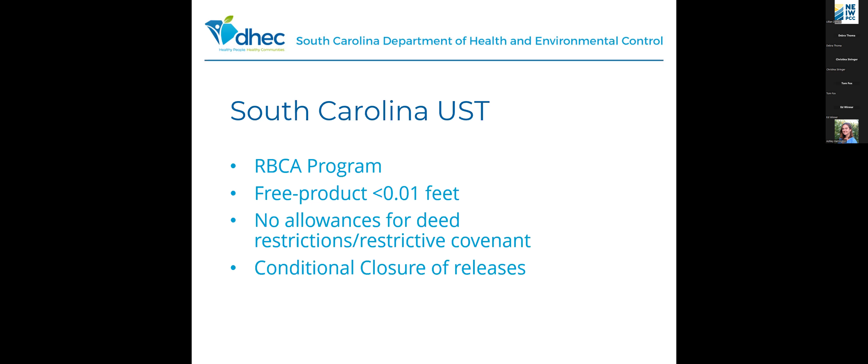A little bit of background of South Carolina's underground storage tank program. We are a risk-based corrective action program, which means site target levels are generated to be protective of identified current and future receptors such as surface water, features, utilities, water supply wells. Our closure requirements include that free-phase product be removed to less than 0.01 feet as measured in monitoring wells installed on the site. The program does not have any closure allowances for deed restrictions or restrictive covenants. We do have conditional closure of releases under the conditions that concentrations are below those established site-specific target levels, the plume is determined to be stable or decreasing, and future receptors will not be impacted.

A little bit of the history of our program and our remediation. We have been a pay-for-performance program. We began conducting various remedial efforts in the late 80s, early 90s. In those early days, we thought we understood what a completed assessment was.

Typically, it was 20 or so shallow monitoring wells and maybe 2 deep wells. Our historical remedial efforts were usually one technology, such as air sparge, soil vapor extraction, or in situ bioremediation. Usually, in those rare instances where we had multiple technologies proposed, it was an afterthought and only implemented

when the main technology failed, and oftentimes costs were near exhausted. We now have a better understanding, as we've gone through 20, 30 years, of what constitutes a complete assessment, and

remedial efforts really need to change as site conditions change to effectively remediate sites, so we don't get stuck in that specific technology. We're beginning to see a transition to more of a true treatment train approach, with more defined transitions and concurrent technologies that target different zones within the plume. Hopefully as we get into these more, this presentation can be expanded to really highlight those even better.

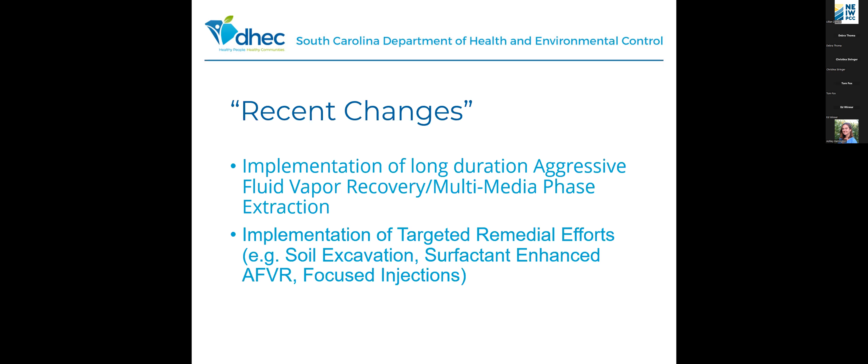For us, it's really a paradigm shift for most to change the conceptual way that we think and approach remediation of petroleum at sites. Many want to stick with what they're familiar and comfortable with, regardless of whether it will be successful. They're hesitant to offer contingency plans in the event that the primary remedial method fails to achieve their remedial goals. So those are things we have to overcome.

These sites were part of our state lead program, which for us means the state took the lead on these to get them through the assessment and remedial aspect. These were sites where the responsible party was determined to either be unwilling or unable to perform the work, and we basically stepped in on their behalf and selected the contractor to get the work done.

This release was reported in 1993. 4 tanks were removed at that time. It was reported as a pre-74 facility, meaning the tanks were last used prior to 1974. Our investigative work was completed in 2006. The lithology is coastal plains, which was interbedded silt, sands, and clays.

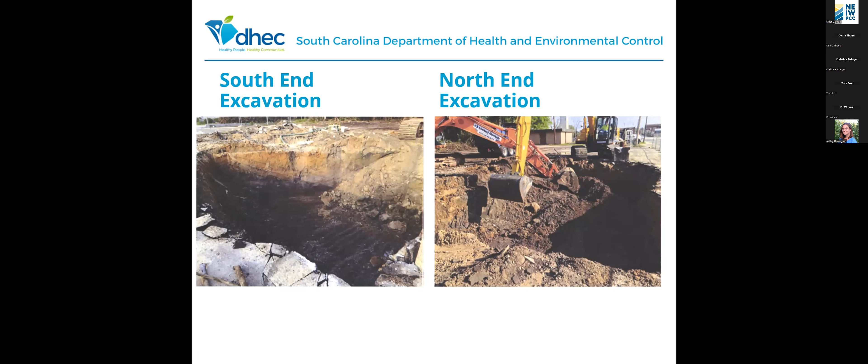This is a couple pictures of the excavation - the south end, the north end. Here's one of the tanks that they found. Here's the 3,000 and the 1,000 gallon tank.

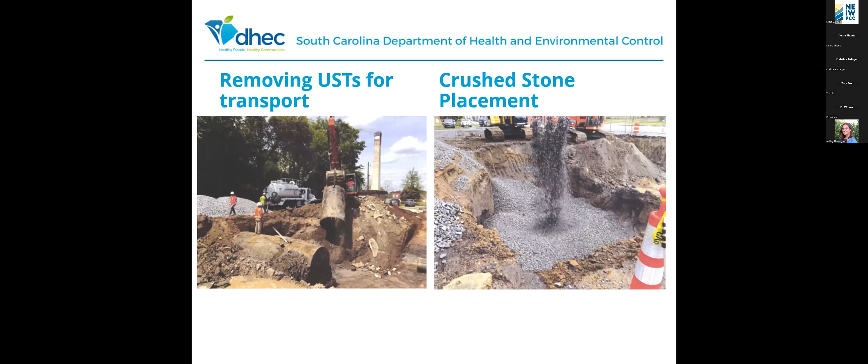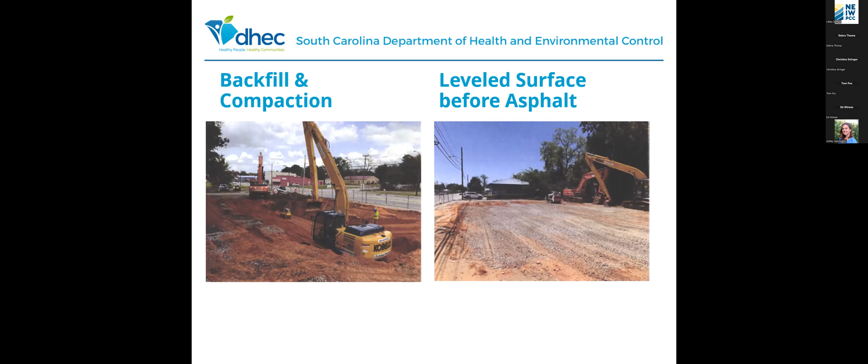Then pulling them out of the ground for transport, then placing the crushed stone in the excavated pit. Placement of the ORC, then mixing the stone with the ORC. Backfilling and compaction, leveling the surface before they did asphalt.

Now at the end, once they asphalted everything, they put 4 wells back in. They did 3 confirmation groundwater sampling events. The final sampling showed residual petroleum in the area of 5.6 parts per million total BTEX. It was below our closure requirements, our site-specific target levels, and we issued a conditional closure for this site in November of 2020.

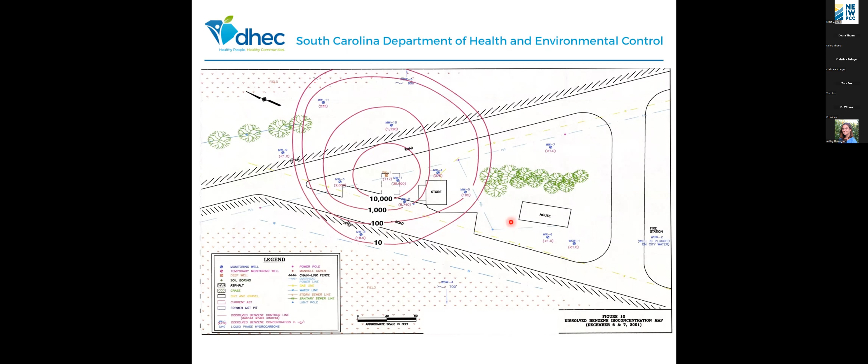So from 2002 to 2008, we did corrective action, which was a combination of AFVR and chemical oxidation. They put hydrogen peroxide and microbial solution was injected into temporary injection points. By January 2007, the free product was less than 0.01 feet, but the dissolved concentrations were still present, with a total BTEX about 83.7 parts per million.

In 2008, the contractor that had been selected to do the work - we worked out a negotiated release of that contractor from the contract that we had entered into.

Now, in 2013, free product showed back up at its greatest thickness of 3.34 feet. There were no tanks out here. We believe it was because the water table rose over 3 feet in that duration. Groundwater fluctuates greatly out here, from 4 feet to 15 feet. So that 11-foot fluctuation basically flushed out a lot of stuff.

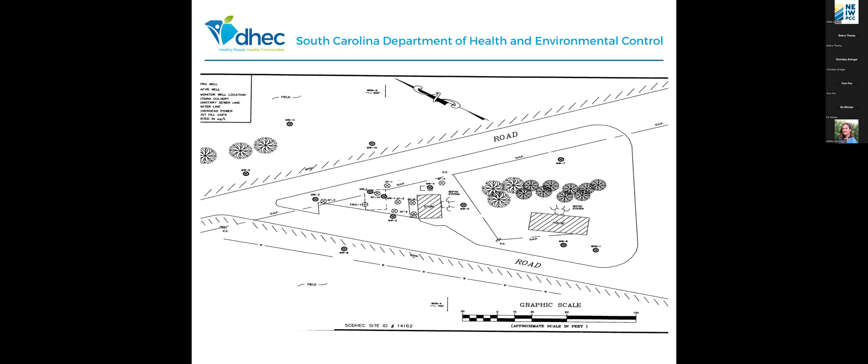2013 to 2016, we conducted some of those long duration AFVR events, and we ended up getting 56 gallons of petroleum as a result of that. We still had a high dissolved concentration out there, and we decided this was another candidate for excavation. So this is the approximate area that they were going to excavate.

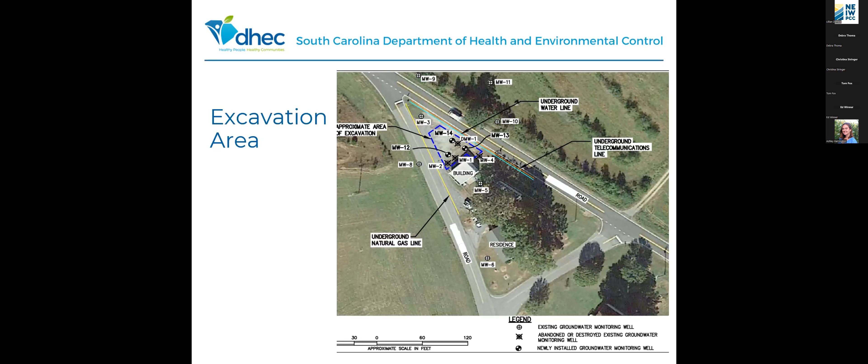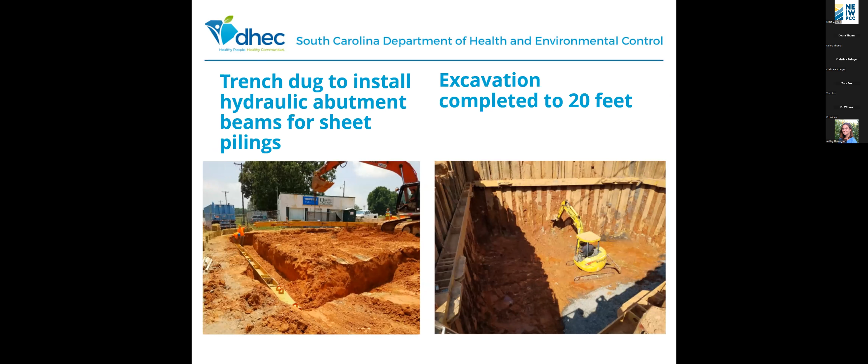They had to dig a trench and install sheet piling to take care of this. This shows them doing some of the excavation. It was down to 20 feet. They backfilled and put in some oxidizing compounds. The backfill and compaction.

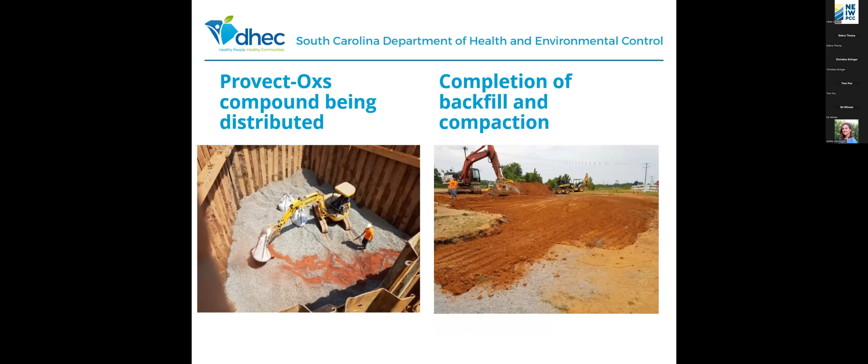And again, once they were completed, they installed 3 wells. They did confirmation sampling in September of 2019, March of 2021, and October of 2021. The residual petroleum was down to 3.9 parts per million, and we issued the conditional closure in December of 2021.

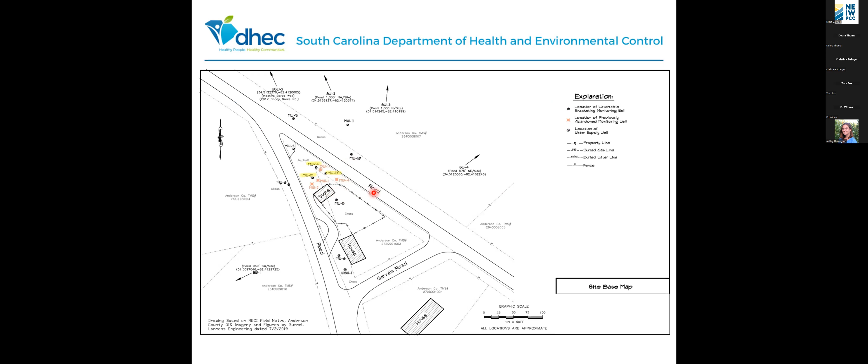Again, just showing the cost for this, our total cost being just $468,000 to bring it to closure.

Primarily silty clay and clay silt. The highest soil reading was about 10 parts per million. The highest dissolved BTEX was 31.4 parts per million. The depth to groundwater fluctuated between 4 and 17 feet.

Remediation was conducted out here from 2005 to 2007. They injected about 2,300 gallons of hydrogen peroxide into 20 injection wells. This is one where the contractor was decertified under our program, and the contract was subsequently canceled. We did some subsequent sampling after that, and the residual BTEX remained elevated around 10 parts per million.

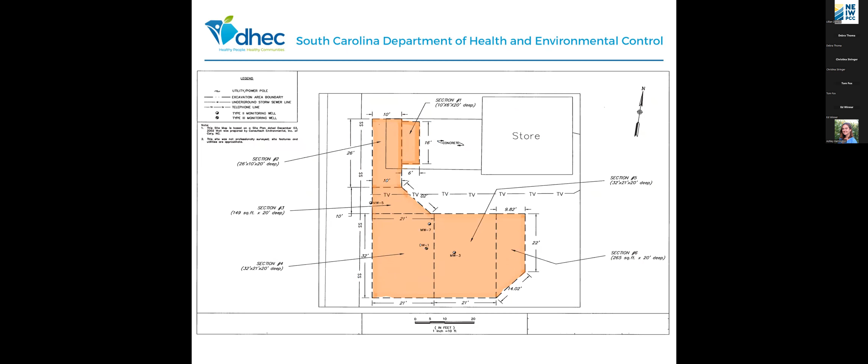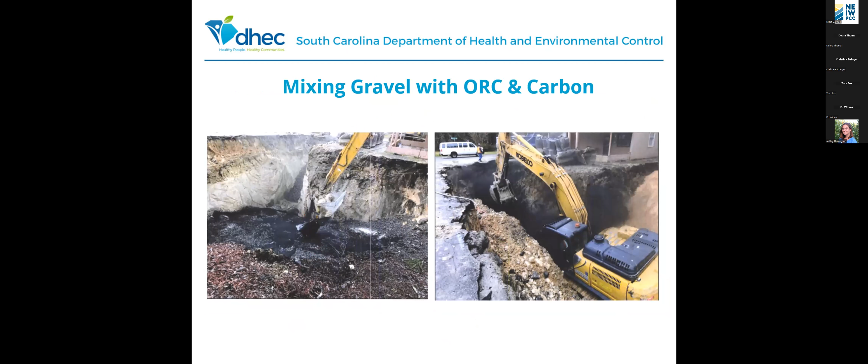They installed 3 monitoring wells afterwards and conducted post-sampling. Residual BTEX was 0.9 parts per million. A conditional closure for this was issued in September of 2022. Cost for this was about $457,000.

The reported release happened in 1987. The tanks were removed in 88 and 2000. Investigative work was completed in 1997. It's coastal plain, so it's silty sand and sandy clay. This house was constructed in 2003. This house was not constructed without controversy.

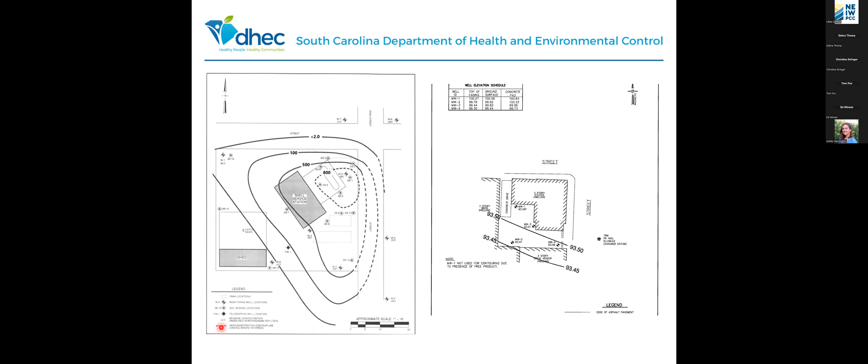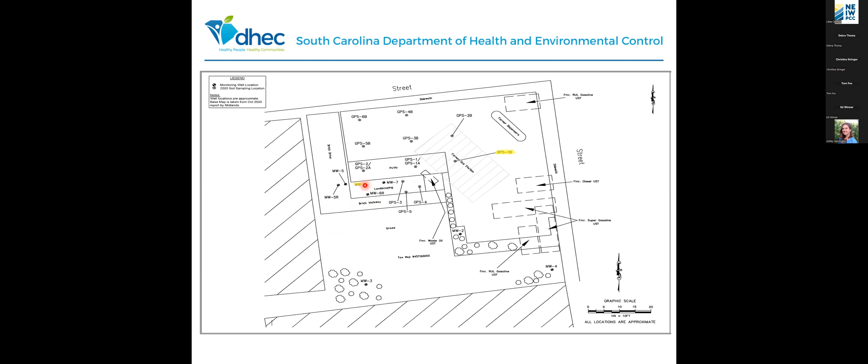Now, this shows what the site was before the house went in, where the hotspot was, and where the house is today. So that hotspot's probably right about there. So in 2003, monitoring wells had to be reinstalled after the construction was completed. We did some AFVR events in this area from 2004 to 2009 because it did have some product. All other wells that were installed out here were non-detect.

From 2014 to 2016, we did some passive free product removal. We did some more AFVR events in 2016 to 2019. In 2020, we did some soil investigation and collected soil samples from the crawl space under the house using a hand auger. The highest concentration was detected here with a benzene concentration of 613 parts per billion and total VOCs of 526 parts per million. So we decided that we probably needed to look at trying to get some of that soil out.

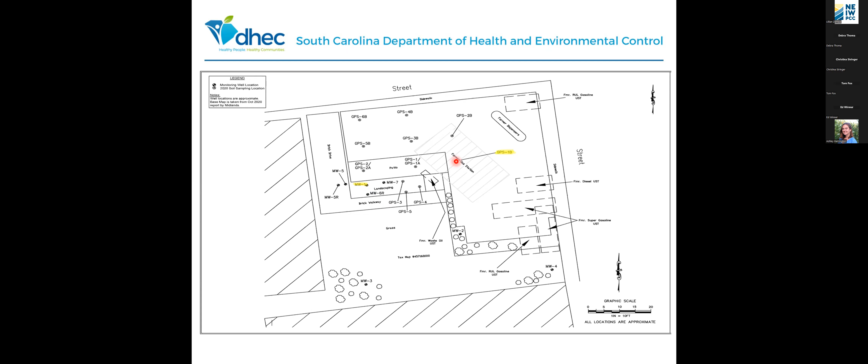So the selected company worked with the property owner and the property owner's engineer to complete the excavation at this site. This was their proposed excavation. They removed 59 tons of soil. The excavation was to be about 8 feet where possible because it was coastal. Backfill was coarse gravel mixed with sodium persulfate.

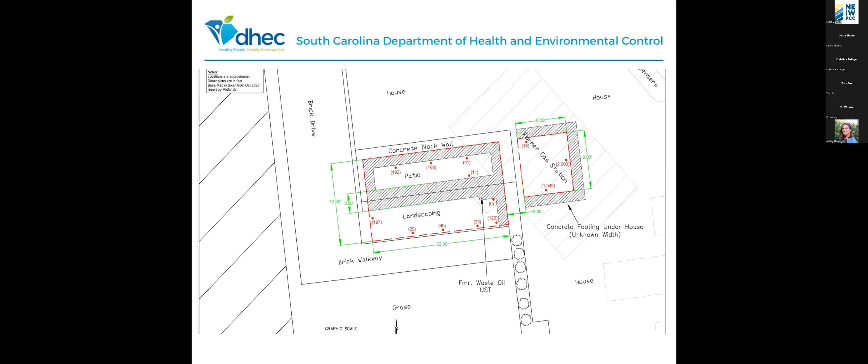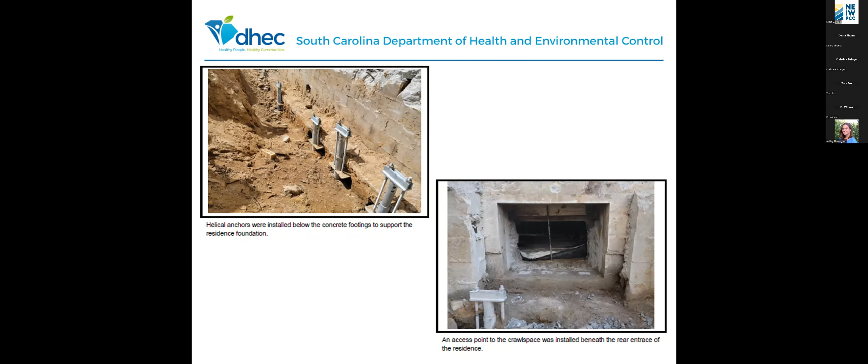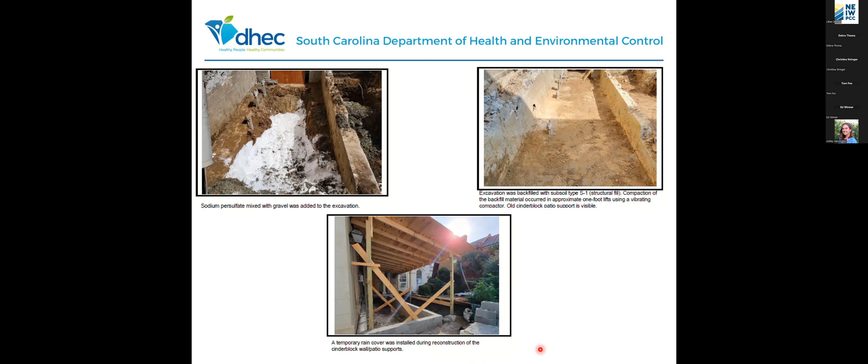They had to do some anchors to support the residence foundation. This was the access point to the crawl space where they had to manually remove soil. This is the sodium persulfate mixed with the gravel. This is outside, basically in here, where they backfilled and compacted. The old cinder blocks and patio support are still visible. They had a temporary rain cover installed during reconstruction. This one, of course, because of the situation, cost a little bit more. Total cost is about $890,000.

So over these 4 sites, the average time to closure was about 28.5 years. The average cost was about $621,000. Again, the sites presented had multiple technologies deployed. We tried just about everything under the sun to get these sites to closure, and we decided that excavation was an effective source removal method and long-term treatment solution, and it was utilized when other remedial methods were no longer effective.

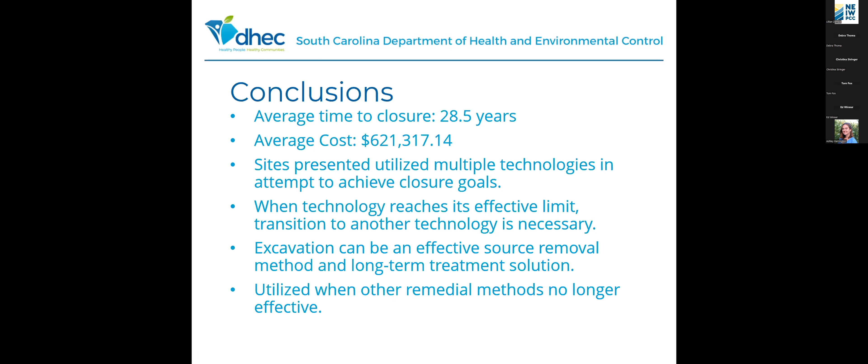And we brought some sites that were what we considered legacy releases to closure. And we're hoping that as we look forward to being able to implement targeted treatment technologies, both individually and concurrently, we can expedite site closures in the future. And it will allow for a more thought out and purposeful implementation of this concept with the remediation of petroleum releases in mind. So with that, if I can get my mouse to work, I am done.

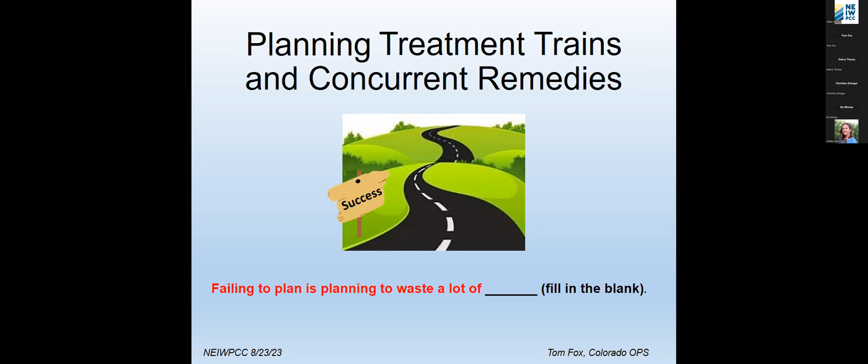Because we all can recognize that failing to plan is planning to waste a lot of, and you can all fill in the blank, but I like to use either time or money since everybody seems to be in short supply of those two things. Now, back in the old days, by the old days I'm talking about anything prior to maybe 2010, many states required that a CAP to closure be submitted. Colorado was one of these states. And we often ran into issues where, what does this really mean? And can you get to no further action or closure of a project in one try?

Inevitably, we found that CAPs needed to be modified, often multiple times over sometimes several decades, as some of Deb's sites illustrated to you. So how are these modifications going to be made? How are cost changes and differences reconciled? And then ultimately, how do you judge remedial progress on the site?

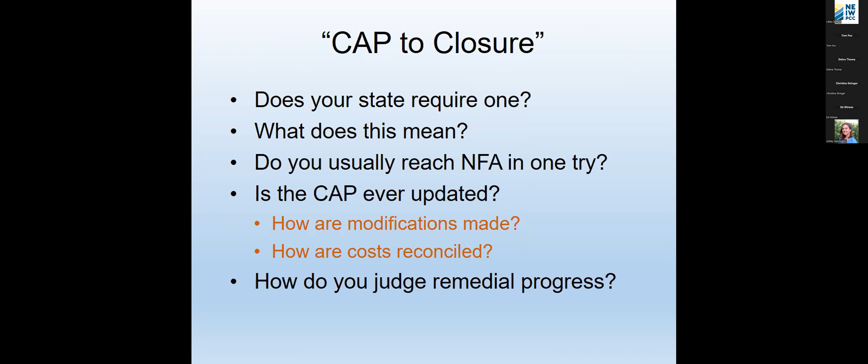So let's talk for a little bit about how to plan the life of your project instead of throwing things at it over time, which is typically an approach that a lot of people try to take. And it's frankly just very unprofessional in this day and age.

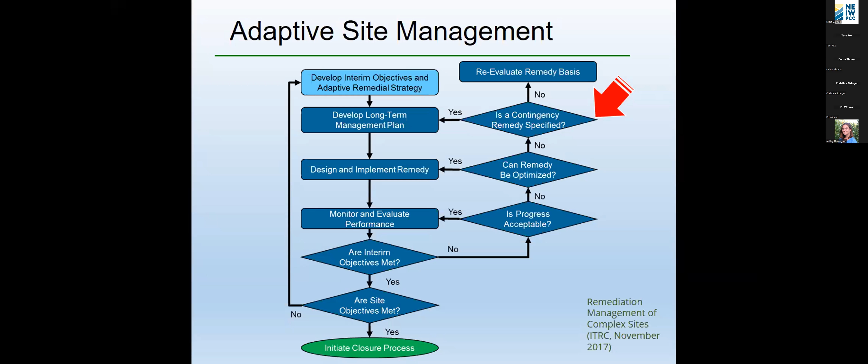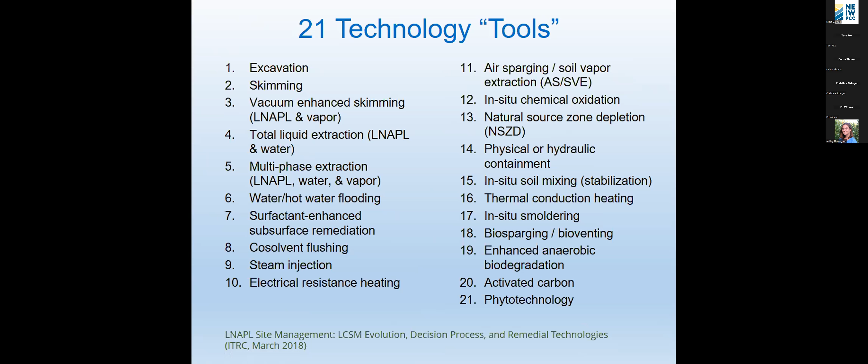One thing that was not included in that document and was kind of frowned upon for its inefficiency are these items: manual bailing, short-term vacuum truck events, and by short-term, I'm talking about a couple hours at a time in various wells, passive skimmers, and absorbent socks. And why weren't these covered is basically because the mass of LNAPL that's recovered is really insignificant when compared to the entire mass that you're trying to address in your cleanup.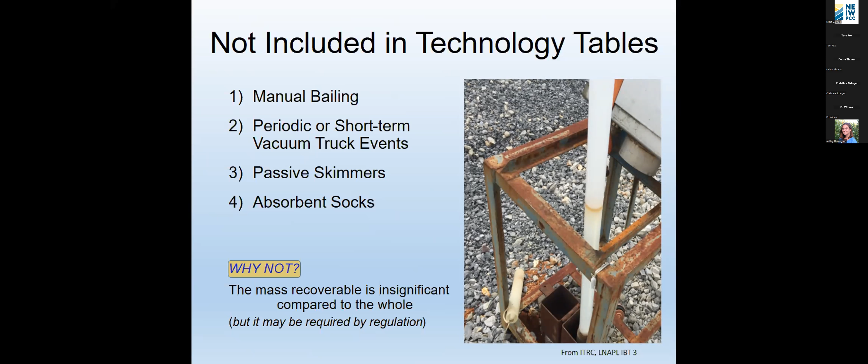In some states, however, these steps may be required. For example, maybe in South Carolina, where they have to remove free product down to 1/100th of a foot. So if you have a regulatory requirement, then you will still need to attempt to use some of these, but I encourage you to talk to your state agency about that.

In the ITRC document, the technologies were broken into 3 general groups based upon what they do to the petroleum as the cleanup continues. The first one is called mass control, which is basically where you're creating a barrier or some type of a limitation on how far the LNAPL can move. Mass recovery tools basically look to remove the LNAPL or the LNAPL mass, dissolved or otherwise, in order to limit that migration. And phase change tools look to address generally adsorbed and dissolved contaminants that are within gasoline and abate those to acceptable levels within the state guidelines.

So, for example, if LNAPL migration is a concern, a mass control technology would be your first group of technologies to look at. And if you had compositional effects, you'd look in the phase change. And there was a nice little ternary diagram that ITRC put out where each time a tool was talked about, it would put a dot in a corner. What was also recognized, however, is that some technologies will actually overlap. For example, you can institute a phase change technology along with a mass recovery technology, for example, dual phase extraction, and get kind of double the bang for your buck if that's something you want to do.

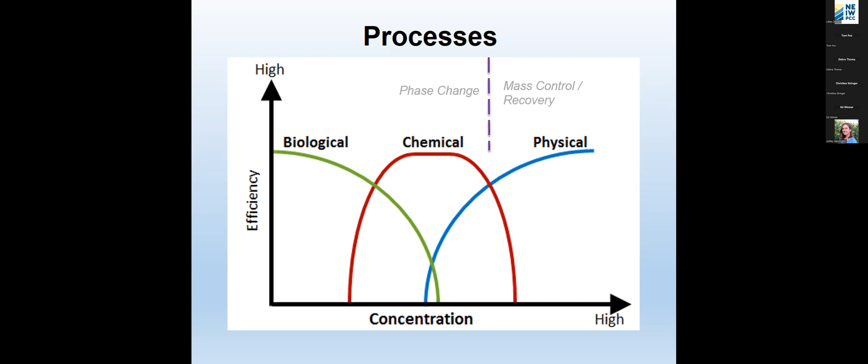What's interesting about this is generally physical controls are useful when concentrations of the contaminants are fairly high. And then as concentration drops, you're getting into more chemical and biological processes to address the lingering effects from the contamination. And again, on the left-hand side, just simply showing the efficiency of when you would use each of these processes. So now that we've introduced these different processes in a different way to look at how these tools work, let's talk about how we can group the 21 tools that we had.

Physical generally refers to they're going to have some type of a site disruption, either excavation or a system installation or something like that. Chemical processes will refer to some physical phase or chemical change to a contaminant, and usually by your influence. And biological changes can be your influence or simply monitored natural attenuation, where you enter into that type of remedial technology and encourage degradation in that effect.

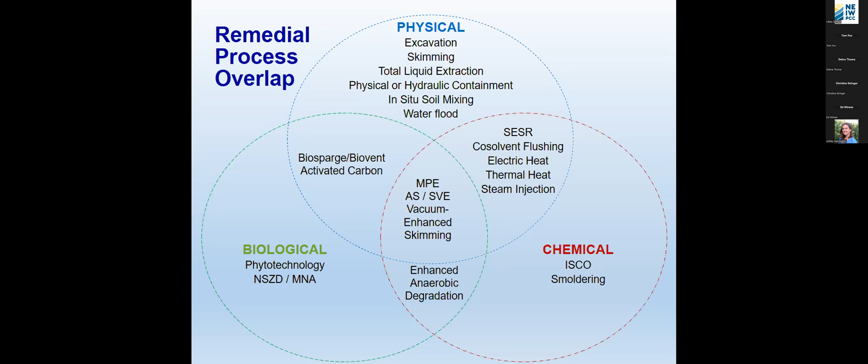So in many cases, biological processes are a tool of last resort, unfortunately, and they're often relied upon where time is not critical or funds or access are very limited, but further cleanup still needs to be taken. So let's talk about some things like what will these tools do? What can they actually achieve for me? So every process has a limit to its effectiveness.

For example, LNAPL recoverability. Everybody wants to get all the free product out of the well and out of the ground. Mainly it's to stop further migration and spread of contamination. There has been extensive documentation that a reasonable LNAPL transmissivity rate is somewhere between 0.1 and 0.8 square feet per day.

If you are unfamiliar with LNAPL transmissivity, I can't get into it here, but I encourage you to look up the ASTM standard and also look on the American Petroleum Institute website for the worksheet where you can do the calculations to estimate LNAPL transmissivity, which is frankly a measure of its recoverability.

Volatilization: typical site tools for this are air sparge and soil vapor extraction. You're going to look to see that the contaminant you're trying to remove has got a certain vapor pressure. In other words, it's volatile. And you may also want to look at what your PID emissions rate would be. You're looking for some sort of a stable amount of whatever parts per million you might choose or your regulator decides to put on the site.

Injections would include in situ chemical oxidation, or ISCO, and carbon injection also. Often soil textures or the geology that you're faced with can limit delivery of an oxidant or anything else you're trying to get into the ground. So you've got to be aware of that.

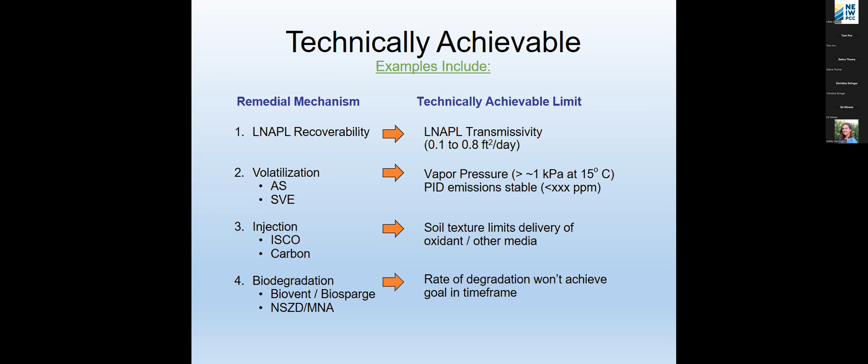So let's talk a little bit about treatment trains. A treatment train is a consecutive remedy in one place. So these are technologies that are implemented in a sequence, as Deb has indicated. And these are based upon what your contaminant concerns and what your objectives are to get cleanup going. Often you're going to start with a primary technology, which might be excavation, as Deb had indicated. And again, that's tailored for the higher contaminant mass that you might find immediately after discovery of a release, for example, or very close to the release source.

And then you would continue on with a second treatment technology, maybe ISCO, again, as Deb has illustrated in her examples, and maybe even move on to a third polishing step, which would be carbon-based injections, or maybe enhanced biodegradation to address the contaminant mass.

What's important and what I want to emphasize with you is to realize that your site, and again, it depends how contaminated it is and how extensive it is to start, but you may be able to clean it up with only one technology, but more often than not, you're going to have to plan what technologies am I going to use when the one I want to start with doesn't get me to closure.

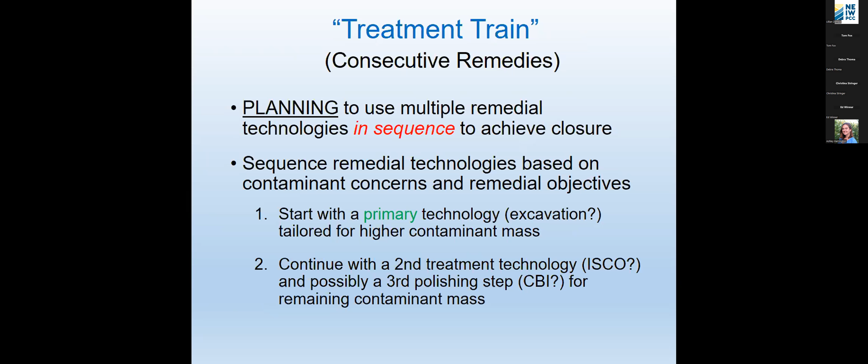So treatment trains, as I've alluded to, very commonly, what is used at a site is unplanned. There's no objectives. There's no metrics for when you're going to move from one technology to another. There's no milestones and endpoints and so on that have been decided to switch from technologies. And this is pretty much illustrated when people are trying to throw more technologies at the problem. Unfortunately, I see this all too often.

Now, what is good about treatment trains is when you plan them with smart objectives, and I'll get into some of this in a few minutes, how you decide when to transition by using metrics and what the milestones and endpoints are for the technology. So we're looking for an orderly implementation, if nothing else in the beginning, at least a conceptual layout of where you think you're going to be moving along this series of treatment technologies as you get the site ready for closure.

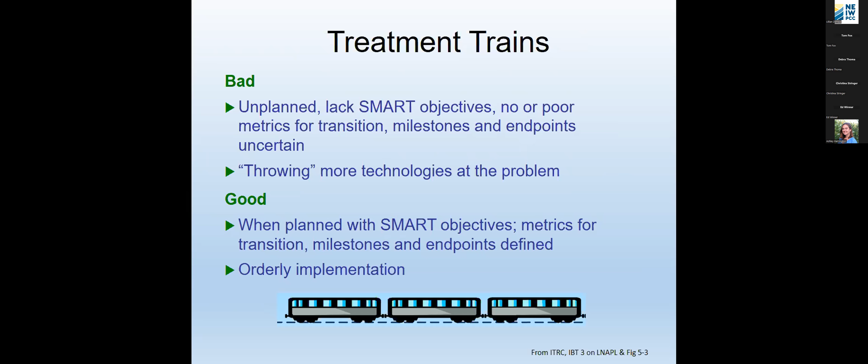So hopefully everyone gets the treatment trains concept. Now let's talk about the cousin that I've referred to, and I've termed concurrent remedies. So before, with treatment trains, we're talking about consecutive technologies where one is used one after the other. These are technologies that are used in different areas, perhaps even at the same time. So how do you plan to do this?

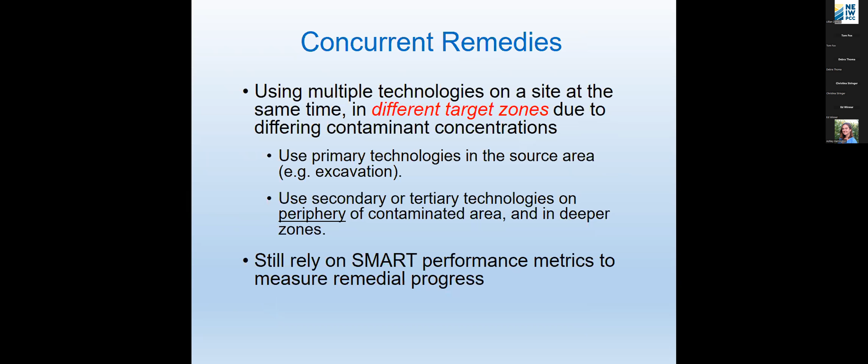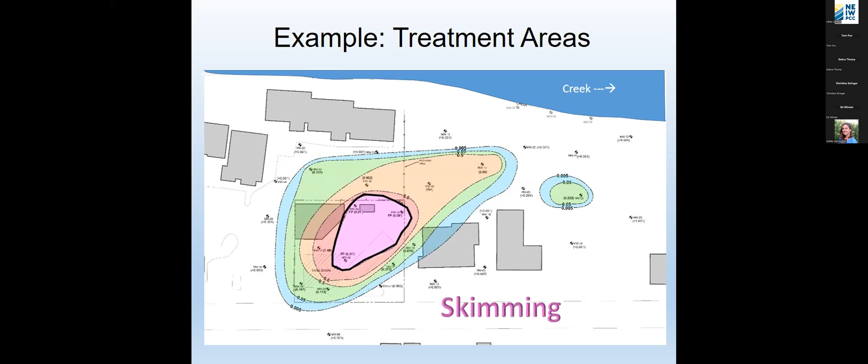So how would we address a site like this when we find it? We've done obviously some site characterization to get to the point where we're ready to do something about it. First we're going to probably look to try to remove the free product that we can. Again, this comes back to, can you do this? Are your LNAPL transmissivity values above the range where it's recoverable? Or do your regulatory agencies require you to go after it? So a technology you might use would be skimming, and there are several others you could do. I'm using this as an illustration only.

The next thing you could look to do would be in the surrounding area where you don't have free product would be air sparging. So this is kind of a halo around the source area, for example. So let's move to yet another area of concern, and that would be the buildings themselves that are outlined. One to the left is the gas station building facility itself. The one on the right is an off-site property. I don't know what it is, and it frankly doesn't matter.

But by the mere fact of air sparging and the high concentrations we have here, you're probably going to generate some vapor. And therefore, you need to mitigate that vapor and abate it by putting in an SVE system around the buildings to protect them so that you don't have vapor intrusion. Now, many people like to come out and they'll do air sparge and they'll design a complete coverage of SVE at the same time. Frankly, I find that a little wasteful of resources and very expensive.

If the vapor is going to go into the soil and naturally biodegrade, as vapor often does, there's really no need to emit it directly into the atmosphere, create air pollution issues, odor issues, perhaps for neighbors, when you can allow it to naturally degrade in the soil. So we always try to get people to focus in on what are you trying to protect with your SVE system, rather than we have to gather up every single drop of vapor that we generate from our air sparge system. You'll find that this cuts the cost of your system and the installation and disruption to the site quite significantly.

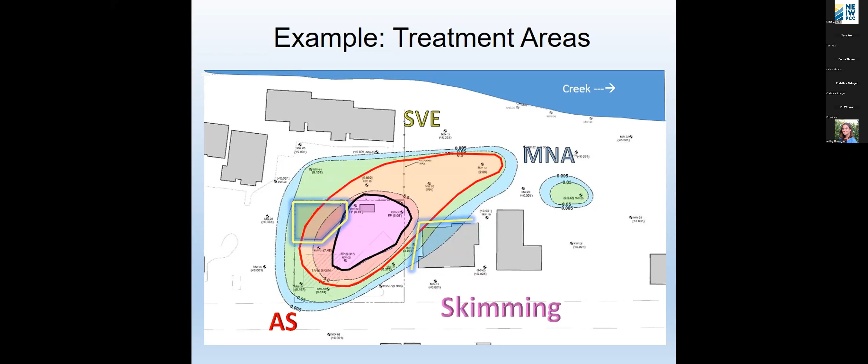Now, one thing - I've shown you a map, and a lot of people forget the third dimension. Depending on your concentrations and extensiveness of contamination, you can use different technologies in different ways. For example, you may be bioventing in the vadose zone, or SVE, as the case may be.

You'll be skimming the LNAPL at the water table surface. In certain areas, you may be sparging where the contamination is higher, or doing enhanced bio or even MNA in other areas where the contamination is less of a concern. So please keep in mind the depth of your target zones that you're after with your technology too.

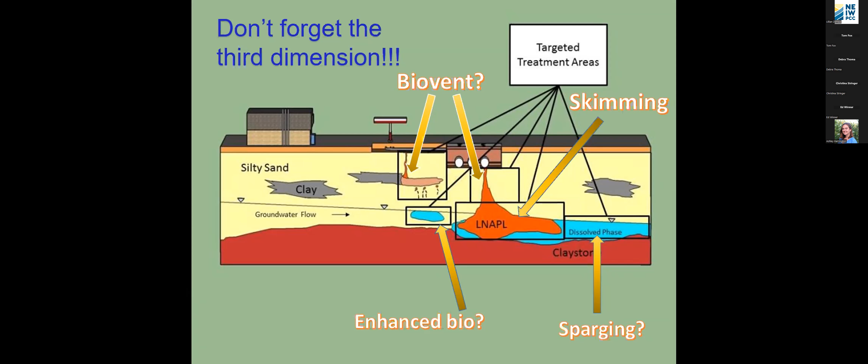A couple terms I threw out earlier: metrics, milestones, and endpoints. A lot of people get these all confused, and at this point they're like, what are you talking about? So let's give an illustration on this.

Let's talk about my vacation, for example. On your vacation, or my vacation, you can move to a different place by any of several different technologies. I've chosen automobile, airplane, or you can go by boat. So your technology is your means of movement.

The endpoint, of course, is the end point of the technology. You can only drive or fly so far, and you have an endpoint - the technology won't get you any further. You have to switch to a different technology. For example, you may fly to some city, you have to rent a car to get the rest of the way, and you may end up walking to get to your final destination. So you can see right there, I've used three different technologies, each with their own endpoint to get me to my goal.

Now, each of those may also have a milestone, and I'll use the last example of the ship - the ship may sail and it will stop in an intermediate port. That is a milestone, a stopping point on the way to your final goal.

What's interesting in this situation is what type of metrics would you use, to use the final term I've already implemented. So metrics would typically be time or distance in this situation - that's how most people would measure how they're going from one place to another. Now, the metrics you'll use for petroleum cleanup are going to be quite a bit different, obviously.

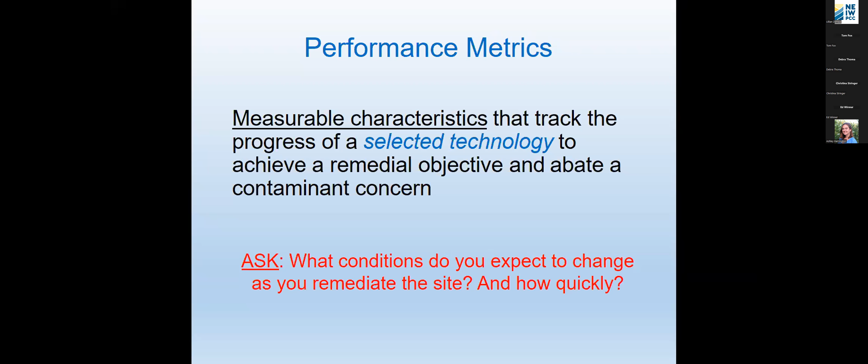So metrics, again to emphasize, are technology specific. You track your progress toward an endpoint or maybe a milestone. You verify that the remedy is being implemented effectively. You allow for any mid-course corrections and optimization of the system operation or design. It also gives you feedback as the system operates and things respond to the forces you're putting on the site, allowing you to update and change your conceptual site model ideas.

You may find that some area of the site isn't cleaning up as fast as you thought it would. There's probably a geologic or some other reason as to why that isn't happening, and oddities like that are worth your time to investigate to find out why your conceptual site model is not what you thought it was.

So here are some examples. For air sparge SVE, we may look at concentrations in emission samples, your PID readings, benzene, and other things you can monitor going up the stack or coming out of the ground. For in situ chemical oxidation, you may want to evaluate the distribution. Often you'll see pH, oxidation reduction potential, and dissolved oxygen change as the ISCO application goes through its 45 to 90 days of life.

For soil vapor extraction, you may want interim or even final soil confirmation samples if your state requires that. And for monitored natural attenuation, you may want to monitor over time the organic, inorganic, or even biological samples you collect to document that natural attenuation and biodegradation are occurring, and perhaps at what rate.

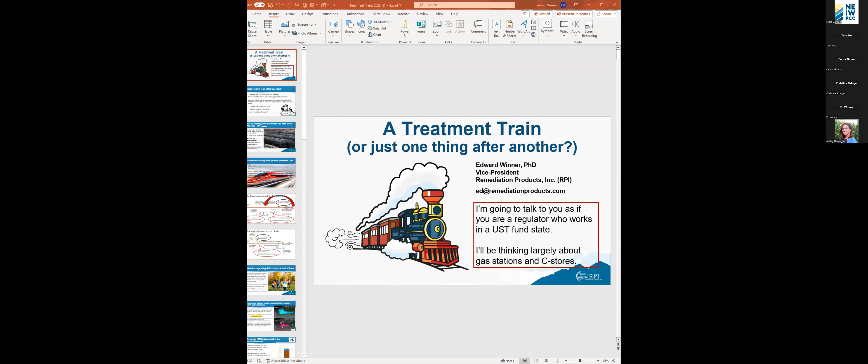Okay, so I want to talk about treatment trains versus just one thing after another. And I like to think about who my audience might be. So I'm going to make up a bit of an audience that may not include everyone who's listening, but that's alright, because then you'll be listening in on someone else's private conversation, which is far more interesting.

So I'm going to assume that most of my listeners are regulators who work in a UST fund state and have to control those funds and produce a result with those funds. And as far as sites, I'll be thinking largely about gas stations and C-stores.

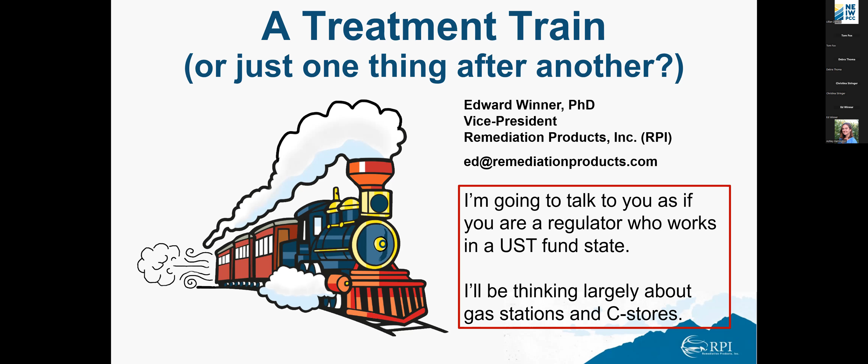So a treatment train is just an efficiency effort. There's no inherent value to employing multiple remedies. You just want to look at each technology and recognize that it has an application and a period of operation for which it is most efficient relative to the geological setting and the site goals.

So what is efficiency? For you, efficiency is just the total petroleum hydrocarbons removed per your effort. And effort for the state is just time and money. So how do we attain efficiency?

You start by knowing what it is you need to do. So do you need to remove one tanker or 100 tankers? In order to have a sense of what that is, you need to have sufficient site characterization. You need to locate the mass of contamination in its three-dimensional sense, both across the site and at depth. And you need to estimate that mass of contamination. That is your first job.

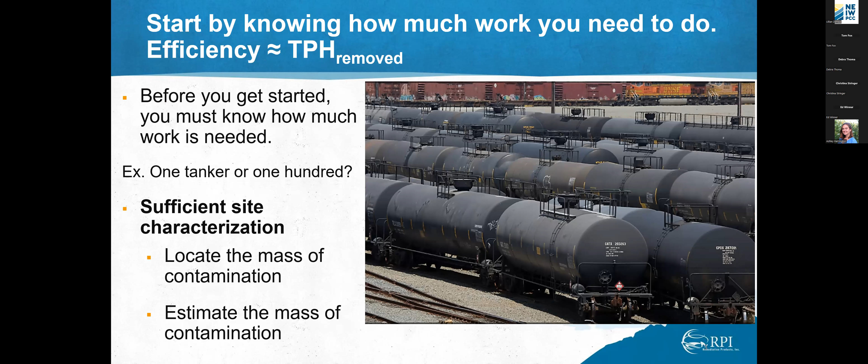It's this characterization which is key to an efficient treatment train. Without thorough characterization, any success you have is just an accident.

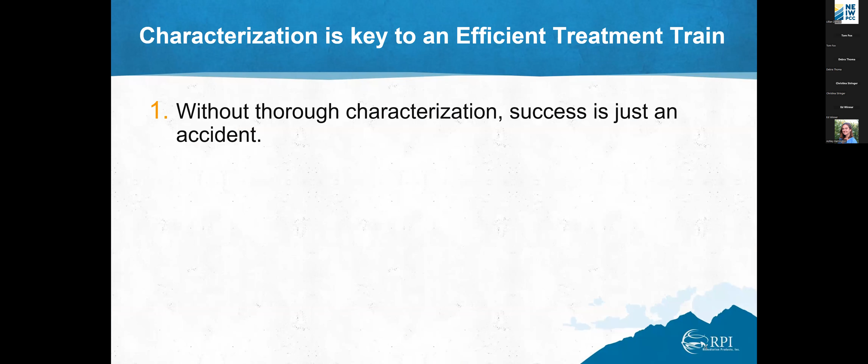Now, this is the most controversial statement I'll make, and people won't like it at all. But basically, if you cannot state a number for the mass of contamination, for example, 725 pounds of total petroleum hydrocarbon gasoline, with a sense of how wrong you can be, plus or minus 75 pounds, then you are in the 'still, I hope it works' stage. And a series of presumptions and 'let's try this' remedies is not a treatment train.

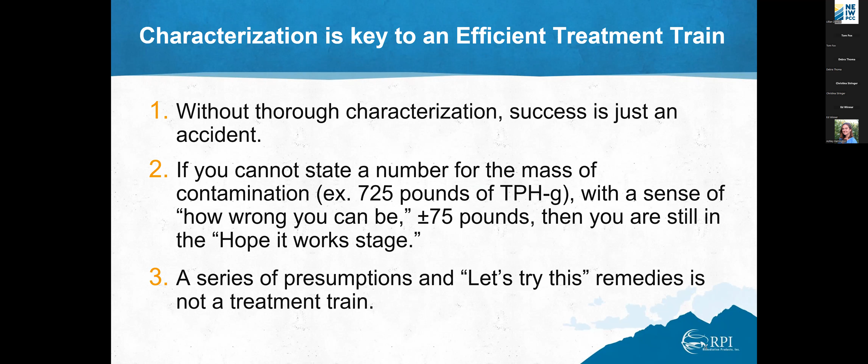Now, here's the common approach to characterization, and many of you have been in these UST programs for some years and have seen this. There is a release. If somebody's reported a release or you find a release and you identify that as a problem, you'll come in and install some monitoring wells and soil bores, generally according to what the regulations you work under require. And you will come back with some results above whatever your regulatory numbers are in those monitoring wells, et cetera.

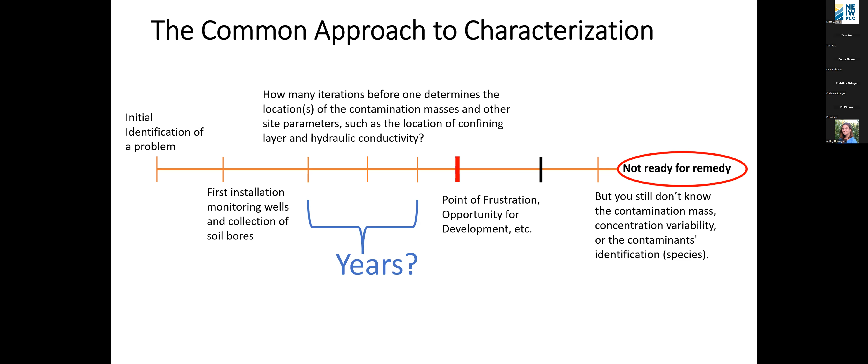And that begins an iteration of more monitoring wells and more soil bores and more monitoring wells and more soil bores, generally sent out as directives to contractors. May not be called directives in every state, but this is the instructions you send out to the contractor, telling them to put in monitoring wells.

In that time, you may excavate the UST, lines and some other areas. You may do some sort of extraction, maybe it's pumping, maybe it's air sparging, whatever. You may put some oxygen in. These are what you'll see as typical efforts on these old sites that you look at, many of them now 30 years old plus.

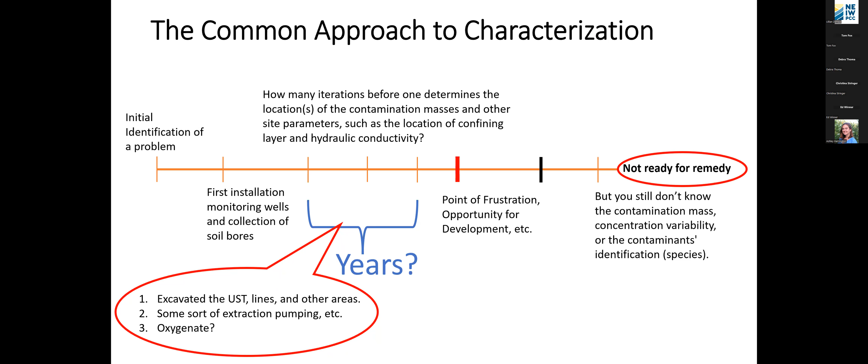And at some point, you hit a point of frustration. You've got a development opportunity that the owner can't pursue, or the owner wants to retire, or whatever. You've heard all these stories. And you realize that you still don't know, after 20, 25, 30 years, the real location of the contamination in this case, since it's petroleum, and its potential mass.

In some cases, the contamination is not fully identified, usually is on petroleum sites. And the physical or geological parameters are still uncertain.

So what do you do? Well, in the last 5 years or so, it's become popular to bring in the real-time field tools at this point, be it MIP, UVOST, HPT, resistivity, et cetera. There's a lot of them that have different purposes.

But in general, let's just say you brought in MIP and UVOST, people look at the cloud diagrams of the contamination and they say to themselves, wow, now I know where it is. Now I'm ready to select my remedy.

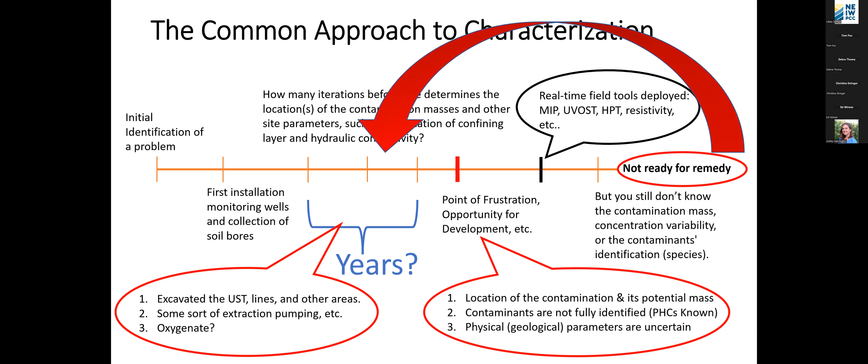But you're still not ready because you still don't know the mass of the contamination. And in some sense, you're right back where you've been, only you've spent $40,000 to $60,000 on these tools.

Now, in this particular case, when the site has already progressed through this history, you haven't done the wrong thing. This is fine. But let's talk about how the site ideally should have gone.

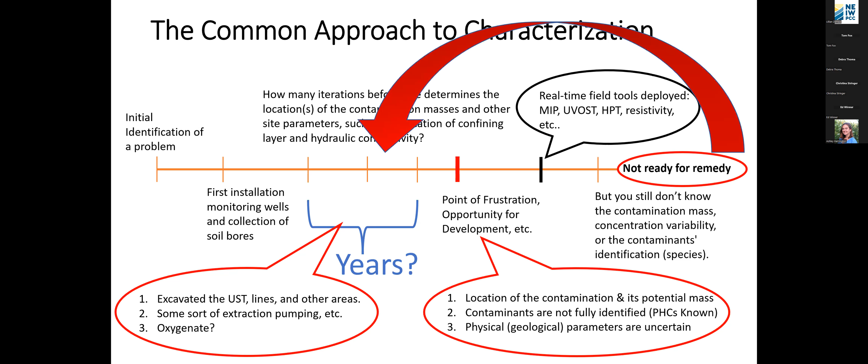So you should identify your initial problem. You install a limited number of monitoring wells and soil bores as per your regulations. And then instead of getting into an iteration of installing more and more and more, go ahead and bring in these tools early.

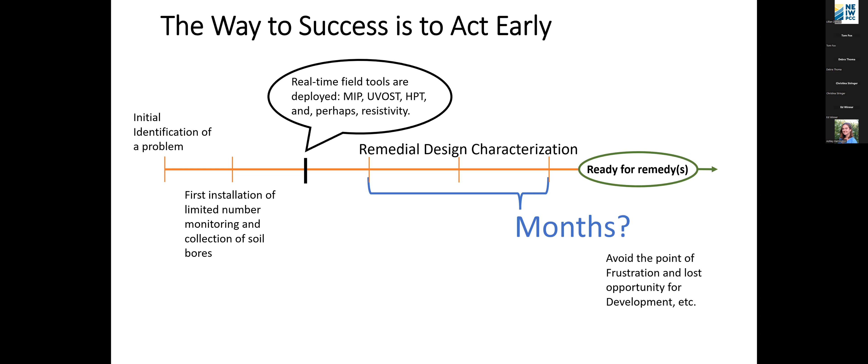And I don't have time to describe each of these in a treatment train presentation, but nevertheless, bring in MIP, figure out where your dissolved phase is; UVOST, figure out where you're bound to the soil mass. And at that point, you'll have a good idea where the contamination is on your site. The location of the contamination, the physical parameters, but you still need to collect soil samples for mass and speciation.

A lot of times this is where people go wrong. They think, I just spent $40,000 to $60,000 on these real-time field tools. Why do I now need to collect soil samples for mass and speciation? We'll get to that. Now, you can also use the same data to direct whatever additional monitoring wells you need, whatever additional soil samples you need. So that's why it's very valuable to do it early in design. Plenty of soil and aquifer sample material.

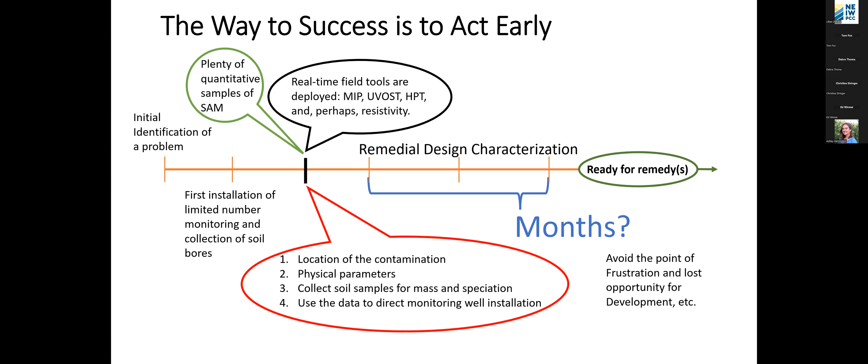Now, you have avoided that point of frustration, the loss of a development opportunity. And if you can turn the directives around fast enough, instead of taking years on a site, you're going to need to take months, because now you are ready for remedy. But let me emphasize the basics regarding field characterization tools. MIP and tools such as UVOST or OIP, etc., are intended to speed and optimize and reduce the number of soil samples and monitoring wells needed to achieve site characterization and ultimately help you meet your long-term objectives.

But they are a little bit like the child's game, hot and cold, you know, where you hide an object, and as someone gets closer to it, you say, you're getting hotter, oh, you're colder, hot, warm, cold, etc. Field tools can tell you whether you're hot or cold, and I'm generally speaking of UVOST, OIP, and MIP at this point. They cannot tell you how much, and they can't address bedrock, which is a question we won't be dealing with today. So you need more soil and aquifer material samples post the use of the field tools.

Now, most regulatory agencies will require between 10 and 20% confirmatory samples. Now, I understand the controversy regarding the use of the word confirmatory, because you're not really confirming so much as you're just following through and making sure. But nevertheless, to calculate a mass and the variability, you need quantitative data. Without an understanding of variability from quantitative data, you can't make predictions, and your 3D representations are just cartoons.

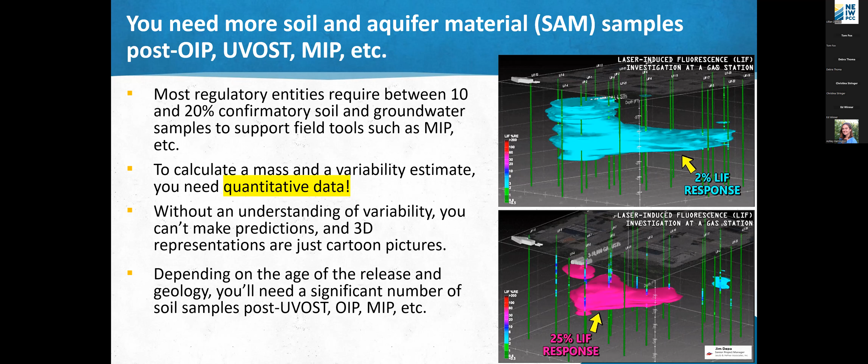Now, once you've thoroughly characterized the site, you know how much mass you have. 725 pounds, plus and minus 75 pounds. And I know pretty well where it is, better than roughly. Now you can select a remedy. Now, I can't go through all 21 remedies, and I won't even try to touch as many as Tom touched upon. But I like to think of them fairly simply. And that is, when do you dig?

You can presumptively dig tanks and lines when the cost of the excavation is less than the cost of characterizing the area to determine if it should be excavated. Now, right now, anyone who's listening from California or New York is laughing. They're on the floor rolling around because that probably never exists for them. But in the South and throughout the Midwest, this can easily occur, where the cost of just running the lab samples is more than the cost of excavation.

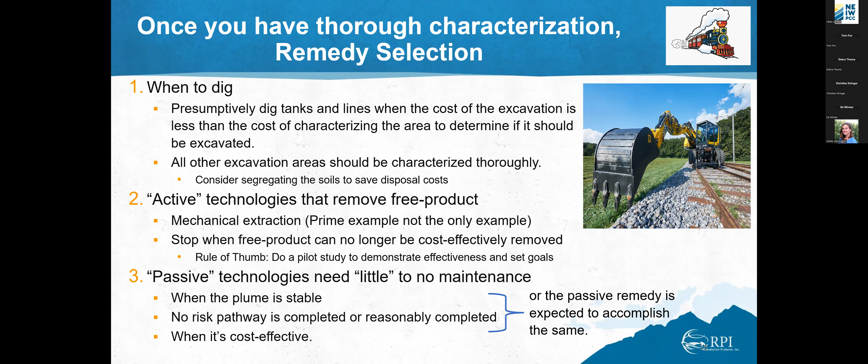Let's look at an active technology. Now, I'm picking on dual phase extraction today, I guess, but I want to show you a published study that asserts the dual phase system was successful and suggests that additional dual phase extraction be pursued on the very same site. Now, don't misunderstand. It's a very well-documented technology. There's no reason not to employ it when appropriate, but efficiency with active technologies is very difficult to sustain. Tom kind of hit upon this when he said, the first 90% is easy, the last 10% is hard. That's similar.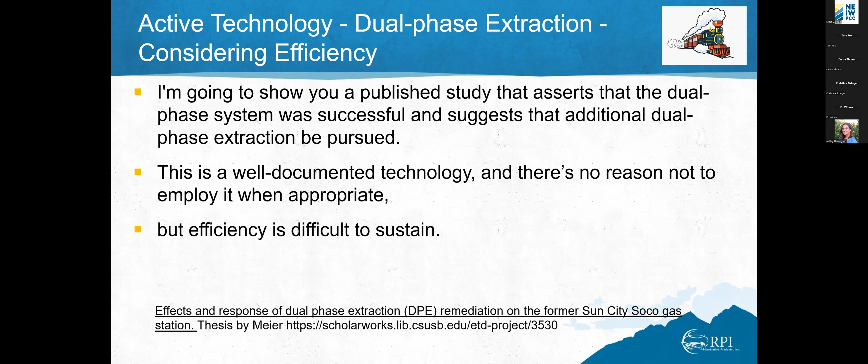So the general site characteristics, and I'm going to be very general with this. It's a Southern California gas station with hydrocarbon contamination within layers of permeable silty sand. The permeability is 10^-9 to 10^-6 centimeters squared a second. These levels are between silty sand to a medium, so should be good. It had been monitored over a decade, and groundwater fluctuations are between 1 and 2 feet, so they're fairly limited. The expectation is that this site is highly conducive to dual phase extraction.

Now, prior to this effort, they had skimmed on the site. They skimmed for 55 months and removed 218 gallons of free product. This site also had significant oversight. There was university oversight. There was oversight from an oil company, from the contractor, and from the state. So a lot of people were looking at this saying, yep, this is what we should do.

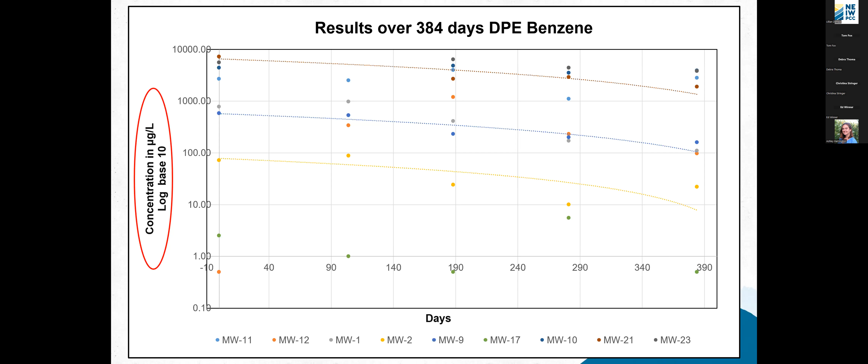Well, I'll sum this up in a manner that will be easier for you to understand, and that is after 384 days of operation, they extracted 81 gallons of total petroleum hydrocarbons, gasoline. They disposed of 41,400 gallons of impacted water. Now, they didn't tell me exactly what the concentration in that impacted water was, but I looked on the previous chart and said, let's say I make it about 1 milligram a liter and then make it all benzene, so it'll make the calculation easy. That's about 180 mils of benzene in that impacted water. 81 gallons and 180 mils.

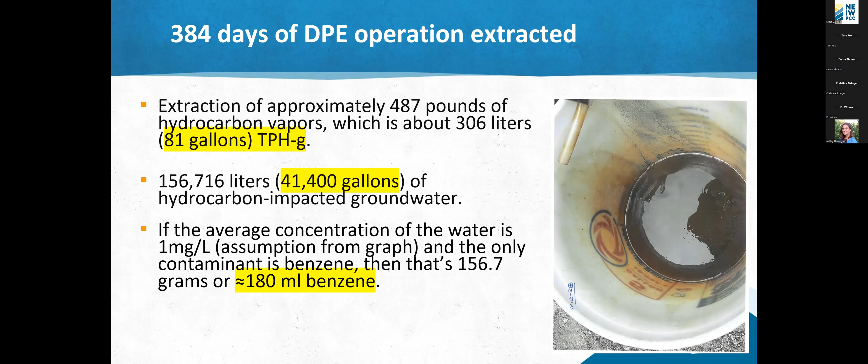So was this efficient? Well, the stated goal in this particular project was to improve the quality of the groundwater underlying the site. So it was a vague enough goal. So, I mean, clearly you can meet that kind of goal. That kind of goes back to what Tom was mentioning, that you really need clearly stated goals. And they didn't state the mass. They didn't state the error on that mass prior to initiating work. So it'd be difficult to say what percentage of the mass they actually removed for their effort.

The system itself also had a fixed operation. So they would move the extraction points quarterly. That was it. Every quarter they'd move them. They didn't look at the data to see if it needed to be moved earlier or later or anything like that. They just moved it quarterly. And the movement, as I just mentioned, didn't flex based on data. Now, I can't really say whether this is a success or not. Why?

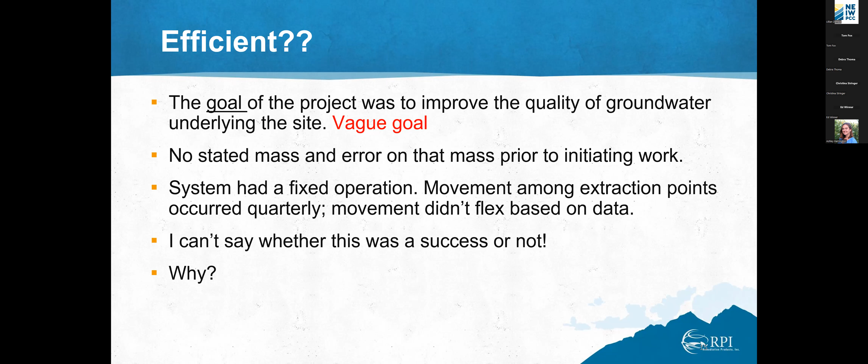Well, I estimated the cost, and what I did is I used the guidance from Texas, looked at the guidance from Kentucky and guidance from California. And I did an estimate of the cost, which was not in the published paper. And I purposely estimated these costs on the low side.

To give you an example, number one, personnel mobilization cost is $840. This was the engineer getting in the car and riding out every quarter and standing around for an hour or two and coming back. So obviously that's a cheap cost. Operation and maintenance of the DPE system for Midwest cost is about $600,000. The reporting cost, and this would have been the initial design, the design implementation, the quarterly reports, and the final report, would be about $12,000.

The water disposal itself is almost $27,000, and these are at Midwest cost. If this were California or East Coast cost, it would be significantly higher. So the total cost by Midwest cost, $668,130. California is approximately 1.3 times that, about $900,000. $900,000. That was 81 gallons of TPH, 180 mils of benzene, even though it wasn't really benzene, I just did the calculation that way, or 460 microliters per dollar per day at $1,740 a day.

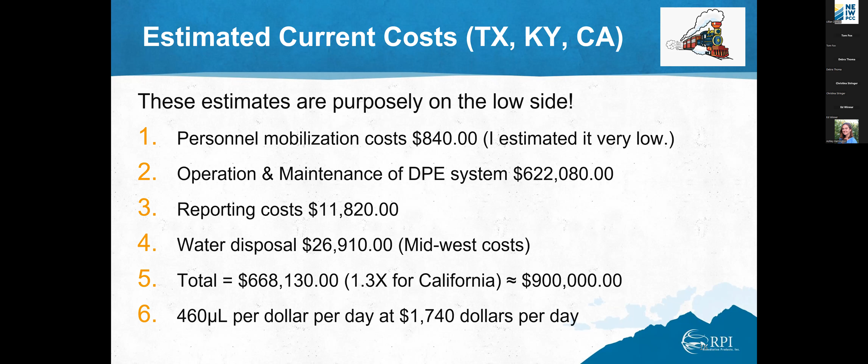So what's the lesson? You need to find the point of efficiency for active systems. Set realistic goals for each technology. Keep mechanical systems of any kind, dual phase is my example, I've just picked on that, it's a perfectly fine system, moving between extraction points and operating at maximum efficiency. Make sure that you are not primarily removing impacted water.

The dissolved phase does not sustain a risk to a site. It may act as the conduit for risk, but it doesn't sustain it. Remember, the mass bound to the soil and aquifer material is what sustains a risk. In the case of dual phase extraction, very popular, and that's why I'm picking on that technology, properly applied vacuum and tip position are imperative. Some people call that tip position the position of the stinger. Both these elements, the proper vacuum and tip position, require eyes on the system.

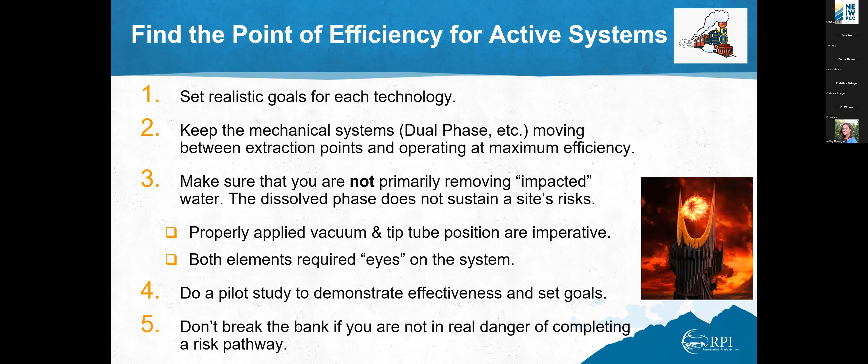If someone's installing a system and walking away from it and coming back later, they are certainly not getting maximum efficiency out of that system. As mentioned earlier, do a pilot study to demonstrate the effectiveness and set goals, not just for dual phase extraction, but for any active system, because active systems are expensive and their efficiency can drop significantly and quickly. Finally, don't break the bank if you're not in any real danger of completing a risk pathway.

See, a treatment train is just efficiency, and you need to balance the treatment train effort to goals. So efficiency is what? The total petroleum hydrocarbon removed divided by effort. And what is your effort? Your effort is time and money. Now, some properties have redevelopment pressure. Other properties are isolated. Some have completed risk pathways. Others are insignificant as far as risk is concerned. And you need to trade time versus money or vice versa according to each site's needs.

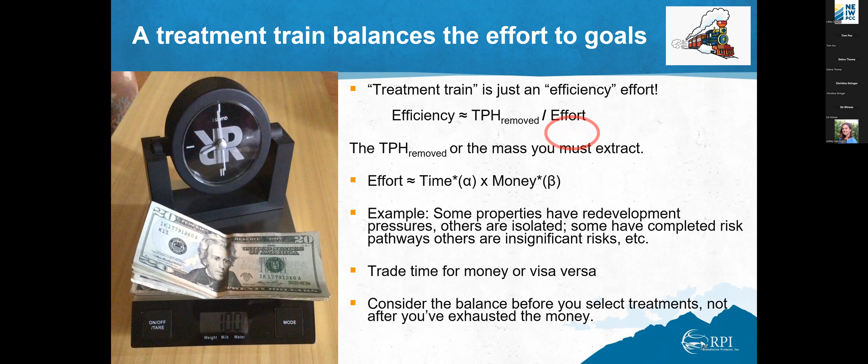So you don't apply the same technology to each site. You don't look at each site as having the same risk, and you don't expect each site to close at the same time because you are balancing. And you need to consider that balance before you select your treatments, not after you've exhausted the money. Effort, time, and money. Now, this is hard for people in a regulatory position to think about unless you've maybe worked in Superfund. But your action should be selected against a no action alternative.

A no action alternative itself is only reasonable when you can cite the mass of contamination and an estimate error on that mass. This assumes you understand the geology well enough to evaluate the potential for completing a risk pathway. If you have the data to know that you don't need to act, keep in mind you also don't need to spend your money on continuous sampling. Now, I'm not really suggesting that you not take an action. But if you think about any sound scientific experiment, you have to have controls, right?

Examining what will happen if you do nothing is your control. If you've worked in a Superfund program, you'll know when you get to the RI/FS stage, which is Remedial Investigation and Feasibility Study, and you pick a remedy, one of the possible remedies is no action. It at least, if nothing else, acts as your control.

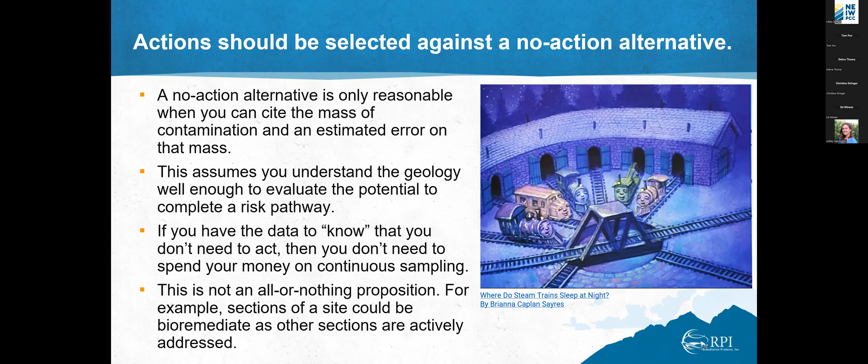Now, it's not surprising that this is not an all or nothing proposition. For example, on one site, you could not do anything in one area and bioremediate in another and do some sort of active remedy on another, as discussed by Tom. But nevertheless, you should have in your mind, what happens if I do nothing? And when you take an action, that action should be relative to the scale of the problem.

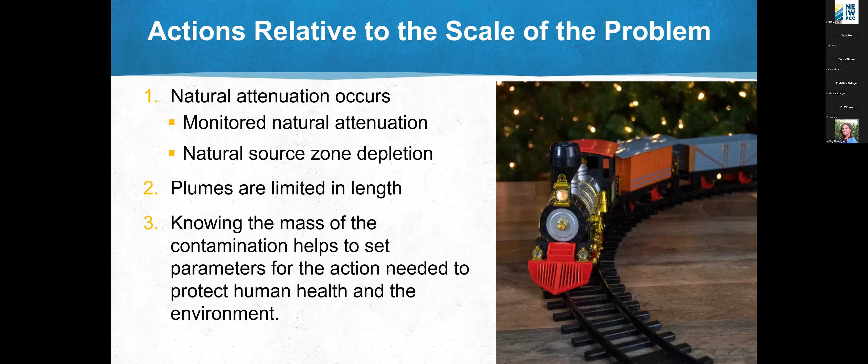So plumes are limited in length, and natural attenuation really does occur. Now, whether you call it monitored natural attenuation or natural source zone depletion, there's some difference between those two ideas, but in the end, nature taking care of it is the idea. So knowing the mass of contamination helps you set the parameters for action needed to protect human health and the environment. And if you know that, then you have a sense of what no action means on a particular site. Now, plumes are rarely out of control.

Ed, I'm sorry to interrupt. I just want to let you know we only have a minute or two left. Well, I'm sorry. I didn't know I went so long. Okay. You just have too much good information. Okay. Well, I'm going to close this up.

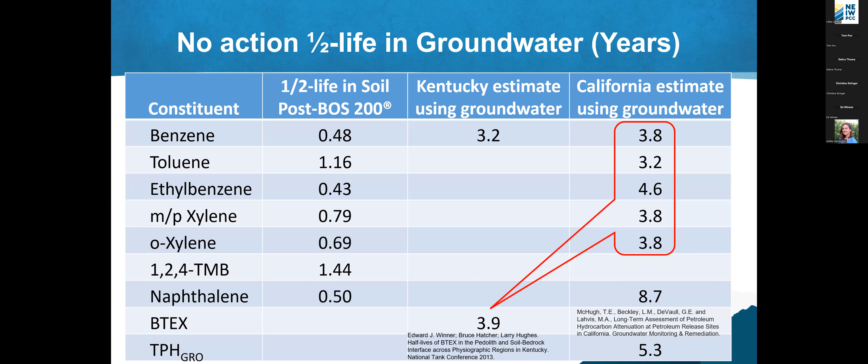Look at your no action. Look at the half-life in groundwater in years. The half-life is about 3 to 4 years. If you take an action, like I see here on the left, that's the post-BOS 200 injection soil half-life. You'll see that it was significantly improved. Most passive remedies are bioremediation to increase your biodegradation. So this is the third point.

You should buffer the total petroleum hydrocarbon concentrations. In other words, remove them if you can. You need to disrupt the soil and aquifer structure holding the TPH mass. You need to provide electron acceptors, either oxygen or sulfates and nitrate. You need to deliver nutrients such as vitamins and amino acids, and you need to balance the nitrogen to carbon ratio. Each remedy may not do all these things, but this is what you would do ideally.

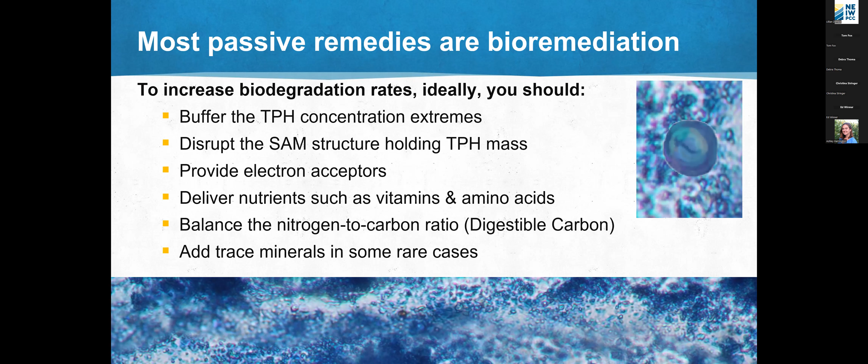Summary. Excavate presumptively when the cost of characterization of the area is greater than the excavation cost; otherwise characterize prior to excavation. Extensive characterization such that you can estimate the mass and error of the mass. Active remediation efforts must be carefully planned and have specific goals, eyes-on oversight, and predetermined cost ceilings.

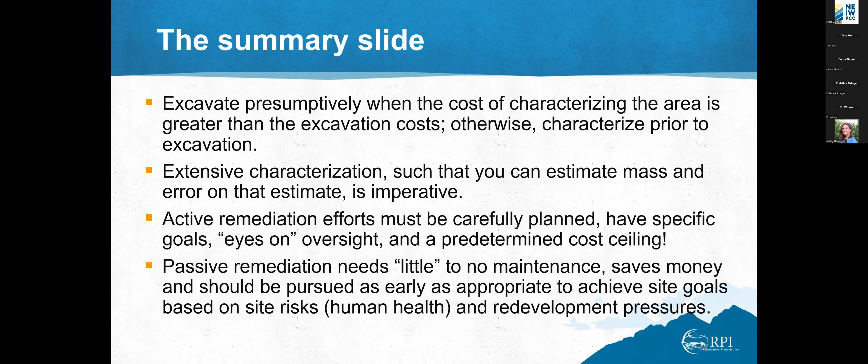And passive remedies need little to no maintenance, save money, and should be pursued as early as appropriate to achieve site goals. There's no inherent value in alternating between remedies. You are simply trying to achieve efficiency by balancing time and money to attain site-appropriate goals. Postscript: always consider the people you work with, because not every project manager has the same skills. What one project manager can pull off at one site, another one may not be able to.